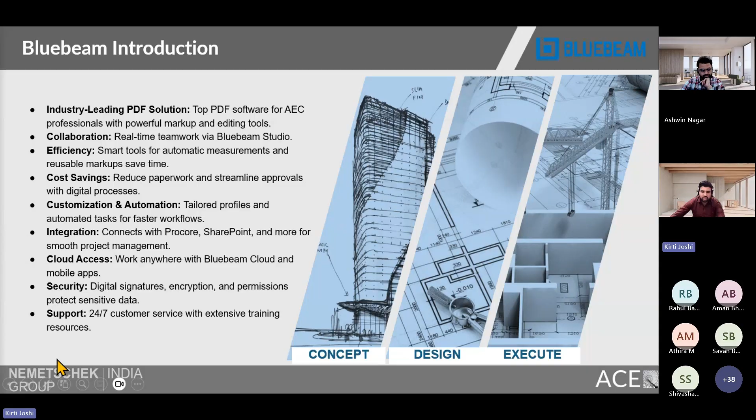Also, anyone can have access to various learning resources and free training courses by signing into Bluebeam University.

So moving to the next slide, now it comes to why Bluebeam? Why not continue with email-based review or basic PDF tools? Like I mentioned, first you can see it works completely on a PDF-based workflow, and we all are aware that PDF is universal.

For example, architects may be using Revit, structural engineers may be using another analysis tool, and even a contractor may be using different software, but everyone can open a PDF. So Bluebeam becomes that neutral coordination platform where no one needs specialized software just to participate in a review.

Second is the comprehensive tool set, all in one platform - you have markups, measurements, overlays, comparisons, or collaborative sessions, everything integrated within Bluebeam. This is extremely helpful for the outsourcing team because switching between multiple tools creates confusion and delay.

The third thing I'd like to highlight is cloud-connected collaboration. This is one of the biggest advantages for the global AEC outsourcing team. For example, your team in India finishes the markups for a drawing in the evening at 7 p.m. Indian Standard Time, and when the client in the US logs in the morning, they can immediately see those comments in the studio sessions. There's no waiting for long email threads and no more confusion about which file is latest. This obviously reduces the turnaround time significantly.

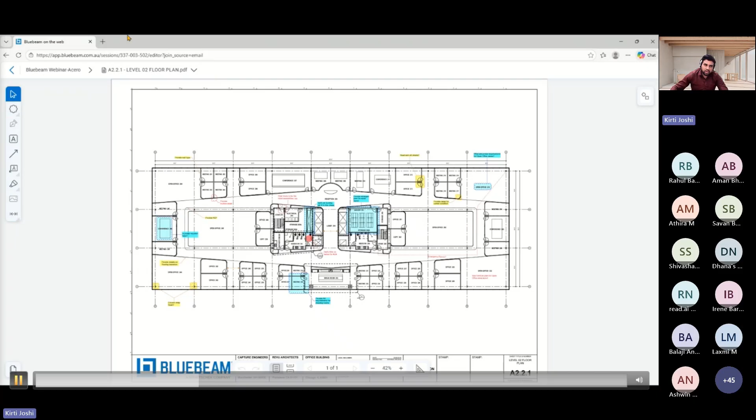Basically, in the web version, users can participate in providing markups and taking out measurements. There are a few features that are available, most of the features they can use, but there are other features limited to the web version. So I will split my screen to show the web version and the desktop version.

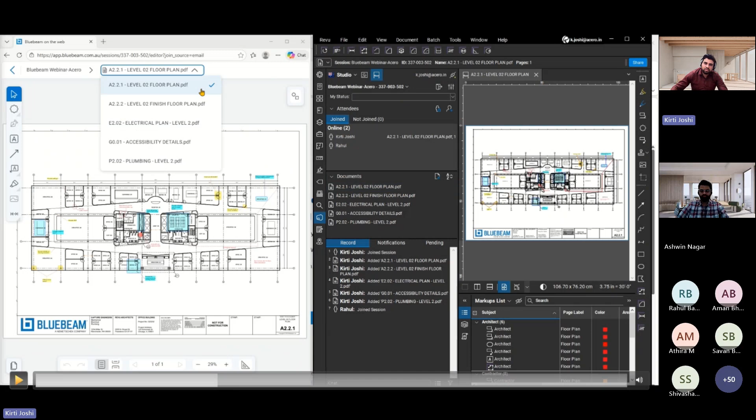So this is the web version, and now I will also open the desktop version. This is the kind of interface difference: in the web version, they get the commenting tools and measurement tools active, whereas in the desktop version they have all the features.

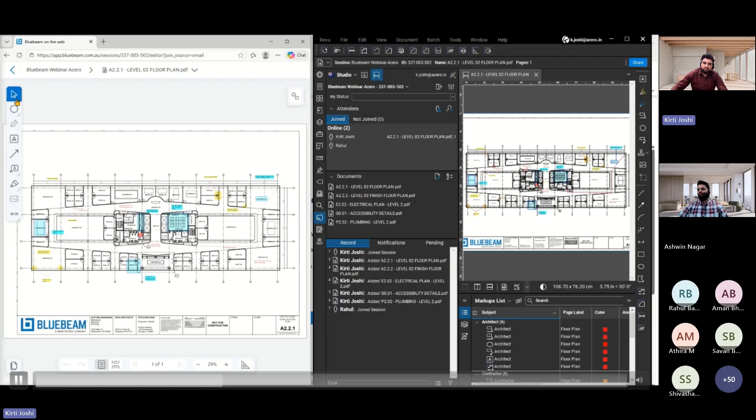For example, on the left-hand side there is no chat box, so this feature is limited in the web version. But on the right-hand side, you can see all the activities are being recorded. So this is the kind of difference between the web and desktop versions, but definitely they can participate in the review, adding markups, and taking out measurements.

So there are different sets of markups. I am creating one of the markups on the right-hand side, and we'll see if it uploads to Rahul's ID, which is through the web browser, or not.

So we are going to create one of the Cloud Plus markups, as you can see. On the right-hand side you can also see it getting updated automatically. So this is the real-time synchronization.

You can also change the text size and the font, depending on how much font size you want to add. So whatever activities you are doing in the PDF, it will automatically reflect onto the other person in real time.

So I'm trying to add a text box through Rahul's ID, and it has automatically been updated in my account through the desktop version.

So if I want to add measurements like annotations, it will automatically reflect in the web. I'm creating one in the web, and it is uploading directly into the desktop version. As you can see, the measurement of 30 feet, the annotation and dimensions applied through the web, is automatically updated in the desktop version.

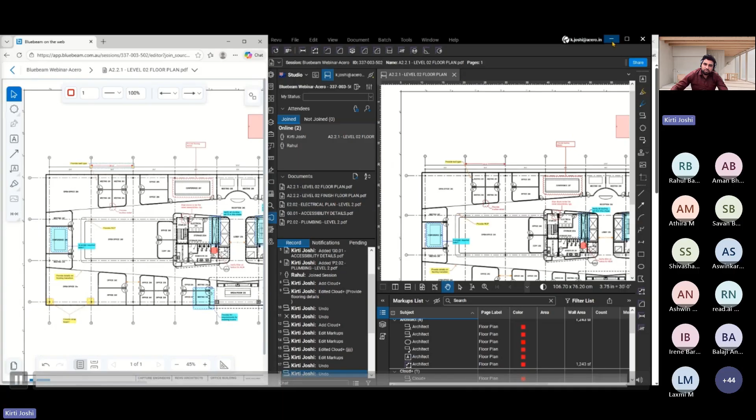So whatever your team members are doing in real time is automatically updated for all the team members.

You have the options on the left hand side of the screen. All of the things that I have done are recorded in the record options below. At the top, you have options to create markups and stamps. So all of these features are fully available through the desktop version.

But like I mentioned, participants can comment and provide dimensions in the web version. So I have created a stamp with our company logo, as you can see on the screen, and we'll see if this has been updated to the web version or not.

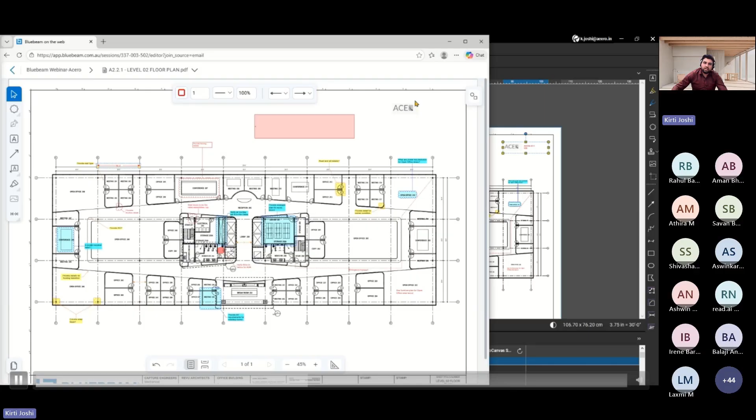Right now you can see it has been updated in the web version also, the stamp that I have created. So you can take out area measurements and it will automatically update in the PDF, and it will be visible in real time to all of the participants.

You can also allot your attendees by right clicking on the markup, so that attendees will be notified that a task has been provided to them, or that a comment is critical and they need to look into it. You can allot attendees from a participant and it will reflect in the record sessions. Right now you can see I've allotted Rahul from my email ID.

Also, whatever you are doing is updated in the record session as well. You have the options to filter out your chat box, filter out the attendees, and filter out your markups and drawings, so that only those particular things will be visible in the record sessions.

Right now I have allotted my other colleagues, so it has been recorded as well. You can filter out these options by simply clicking on the filter options at the chat box below.

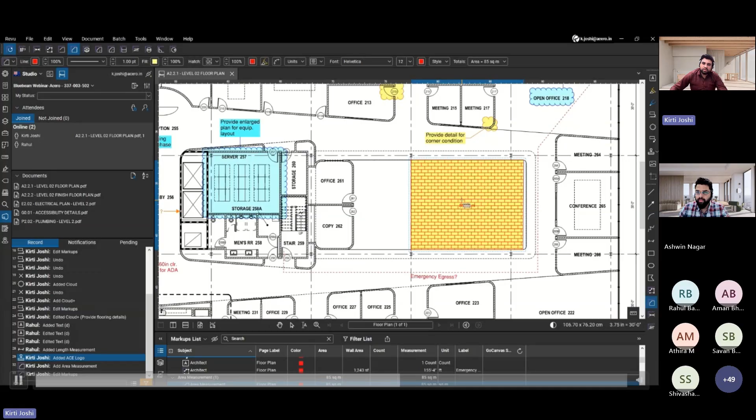So I have taken out the area measurements. We'll also provide some hatch, and we'll see if this has been updated in the web version through Rahul's ID or not. You can see this has automatically been updated in the other portions as well.

You can carry out different types of markups and measurements, and even compare your documents in real time by inviting all of your team members. I've just invited one team member for this demonstration, but you can invite up to 500 users in a single session.

You also have the options to control the settings of these studio sessions, like permissions. As the initiator, you can give out permissions to all of the attendees, such as whether they have the option to add markups or not. I have given all permissions as you can see on the screen. So you have the options to control and restrict, to allow or deny permissions to your attendees.

You can also assign permissions by groups. If there are multiple members from your organization, you can set up one permission by creating a group and assigning it to your team members accordingly.

Once you are done, you can generate the session report by simply clicking on the sessions report and save it. All the activities carried out in the studio sessions will be tracked, including the date, the time, which documents, which authors, and the messages they have provided. All of these things are recorded.

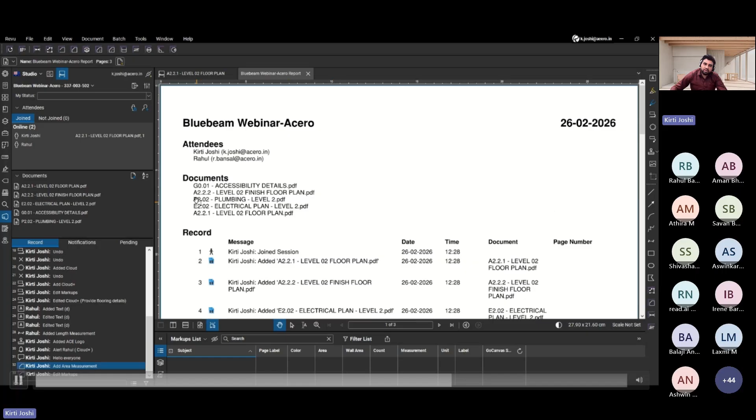You can just share the downloaded file with anyone, or share with all the team participants that this is the latest revision that has been done in the particular set of the drawing. Once you are done with this, you can finish the session. You can see the status has been finished, reviewing, or waiting. So you can set out your status.

If you have completed your part, you can set out the finished option. In the settings options, you have the option to leave the session, or to finish the session. The difference is when you leave the session, you will be able to join it again. But when you finish the session, you cannot.

You are finishing the session for good, and you will not be able to join it later again. Most of the time we simply click leave the session, and once you click on the drop down, there is the finish session option. If you want to finish the session permanently, you can use this option when your project has been completed, or if you don't want to review any of the files again.

Once you have all the things reviewed properly, you can click on finish the session, and you have the option to save all the things that has been done in that session or not. You can save that report, or if you don't want to generate the report, you have the option not to by simply unticking the generate report tab. So you can finish the session whichever way you would like, to generate the report or not for that particular session.

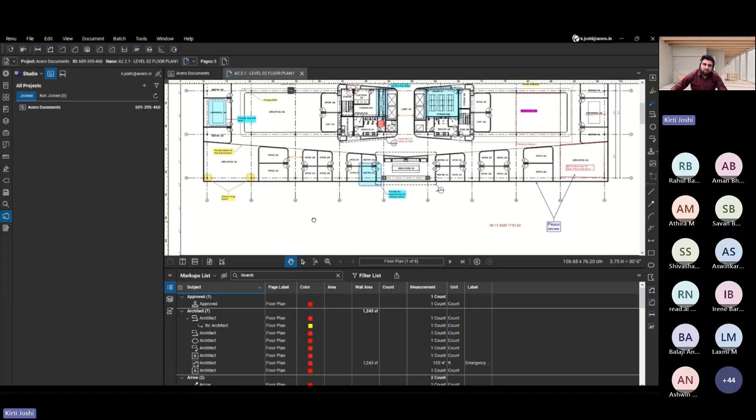So I will check out, then all the other tools will be active right now. On the left hand side, you will see all the tools are active once you have clicked on the checkout feature. If you are already using the studio session, you might be aware of these features as well.

So if I click, I have already checked out, so I can just put a comment. So I've already taken out one cloud and added a comment like provide the details. And what I will do is I will just check in, and it will update in the server. I also have the options to update server copy or check in, then it will update in the server. The latest file will be uploaded. I can also add whatever comments you want to add, so that it will display to the other participants.

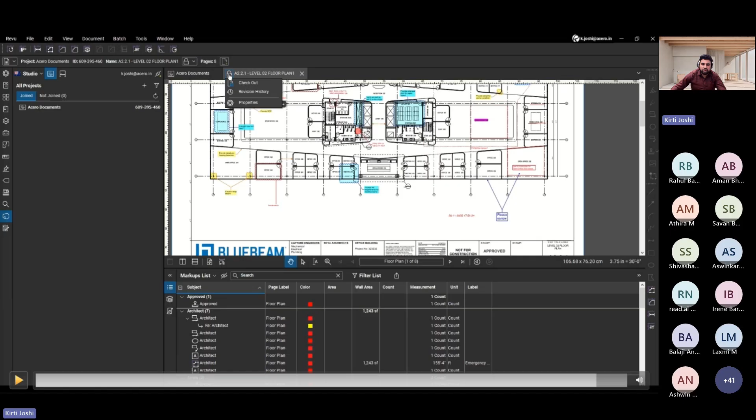Right now, once you do the check-in, in the left-hand side, again, you will be able to see that these markup features have been disabled. And once you click on the lock icon and check out these files again, you will be able to add other markup details as well. So at one time, only one person can work in this Studio Project.

And they can open the document and see whatever changes have been done. And by simply right-clicking, they can see whatever revision history has been made in that particular set of drawings by the date, the time, and the author. So you can track all these activities. And you can simply click and download it, or you can share the link with your team members as well.

You can also set a password so that other people have to use the password link to open that file. So you can set the permission levels, so you will have all those options. So this is basically about the Studio Sessions and the Studio Projects that will help you in real-time collaboration and for storing your documents in the cloud.

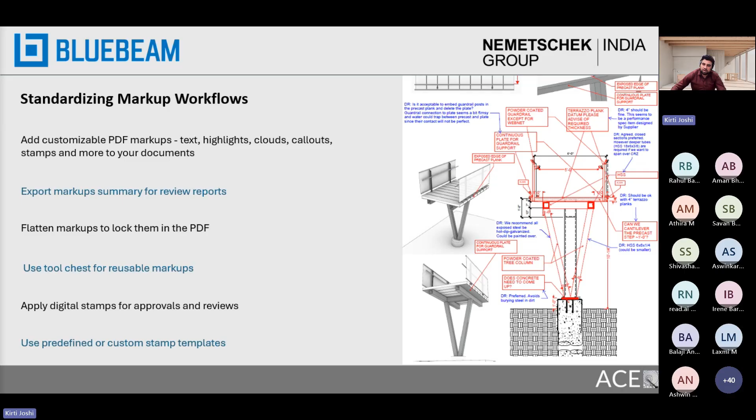So moving forward, Bluebeam also allows you to create markups. It may be the cloud, callouts, the highlight, the text box, the stamp, or the measurement. Again, with the Tool Chest features, you can save your frequently used markups, and you can create a predefined comments library for your organization. And you can also export the markup summaries into a structured report for submission. And once approvals are finalized, you can flatten the markups into the drawing. So all right, let's see how this actually works. I have created a short video to show you in the next slide.

So this is again the interface. If you click on Revu, you will be able to see which version you are using. Right now, the latest version is 21.8. In the top bar, you will have the options of viewing your documents. The batch will work when you are working on multiple PDFs at once. And on the right-hand side, you will have your email.

And by simply clicking on that, you will have the information on which region you are using, because it is server based. Bluebeam creates the account based on the server. So like I mentioned, India comes in the Asia Pacific region. So we have to select the server region Australia, like you see on my screen, and the plan of Bluebeam which you are using will be displayed.

And again, once you click on the Help bar, you will have the options to check for the latest updates. And if you are new to Revu, you will have the tutorials through the help file. So simply by clicking on the tutorials, if you are a beginner, you will have short videos and all the information about how you can use Bluebeam. So you can just use this help feature to learn about the software.

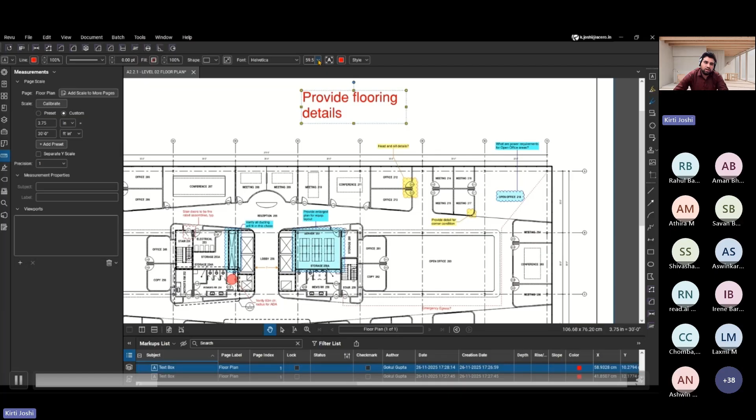Right now you can see the text is a bit small, but we can auto adjust it by simply clicking on this A box at the top. You can see this will adjust my text box according to the size of the font. So you don't need to manually worry about the text size. Once you click on that box, it will automatically update the text font according to the box. Also, you have the option to drag and drop to change the text box size.

There are highlighters available if you want to highlight any parts of your drawings or the text. You can simply click on the highlighter and start pressing it, and you will be able to highlight it. There is also the callout feature available. You can simply put an arrow, as a callout is nothing but a combination of text and an arrow. You can point it at any part of your drawing and add text in it.

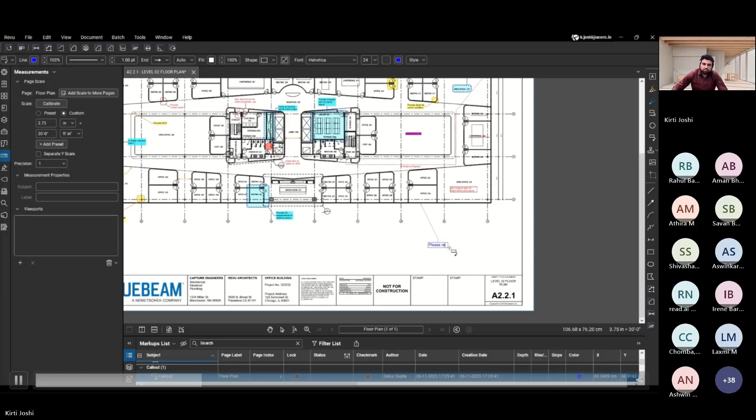Also, once you right click it, you will have the option to add more arrows to it. You can definitely add multiple arrows within your callout, just to point out multiple points on a drawing. You also have the snapshot feature available. It works as a copy. Once you click that feature, select a rectangle and then Ctrl V, it will snapshot it like a copy feature.

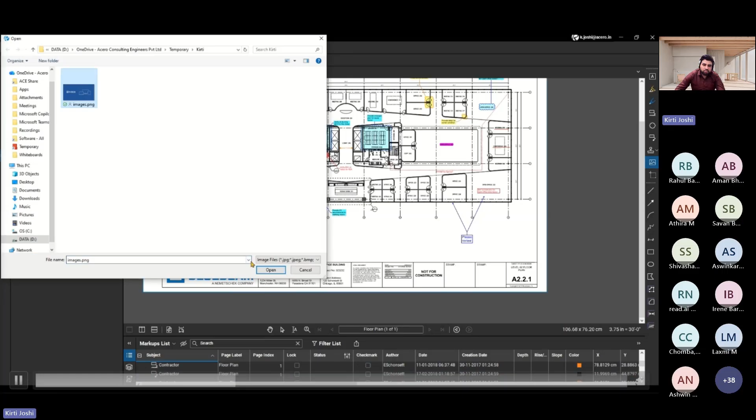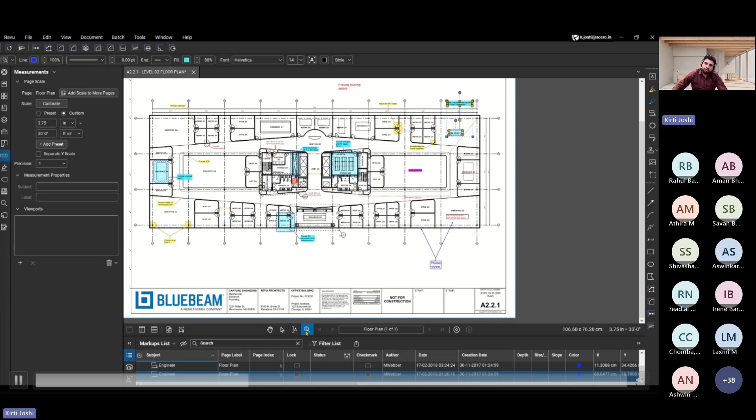You will also have the option to insert an image by simply clicking on the image box. You can increase and decrease the size of the image. Another important feature is that you can insert the image within your markup so that it reduces the space. For example, if I want to add an image within this markup, I can simply click on it, right click, and you can see Capture and From File. I will add this image, and you can see you will have the camera icon here.

The camera icon means that the image has been added to that particular markup, and once you click on that icon, it will open the image. So you have the option to add the image in a different way as well: one way is to add it directly and the other is within the markup itself.

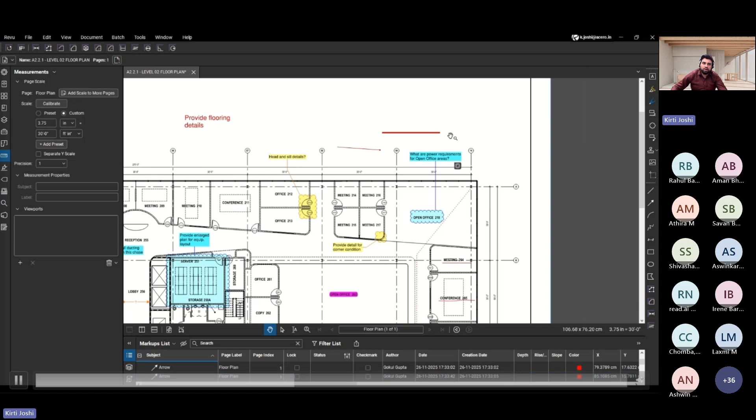You can draw lines, you can put different kinds of arrows, and if you press Shift with this arrow, it will make a straight arrow. So you can add different types of arrows. Once you click on a particular markup, the property toolbar will open at the top, and here you can assign the properties for those lines or any other markups you are working on.

In the tools feature, there are other types of markup available. There is the cloud and the cloud plus. The cloud plus is just like a cloud with an additional text box. So you can use different types of markups and keep things organized while working on a PDF drawing. Also, if you are adding a markup in real time, it will be displayed to all of the participants in the session if you're using markups in a Studio Session.

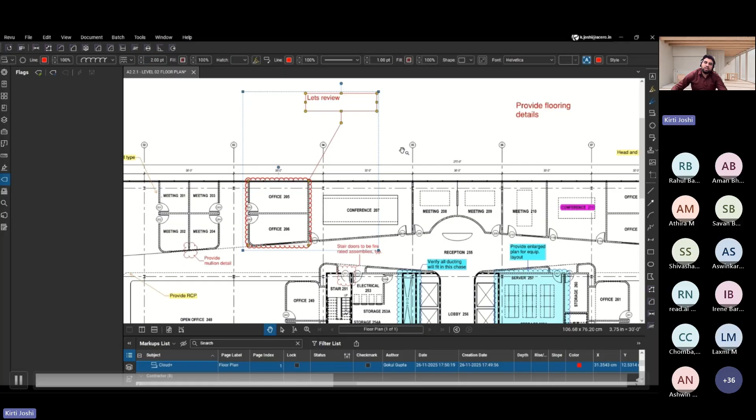So again, the stamps. After the markup, you can add the stamps. There are lots of predefined stamps available. Also, you can create your own custom stamps, for example, a company logo or anything. You can also add that stamp as well.

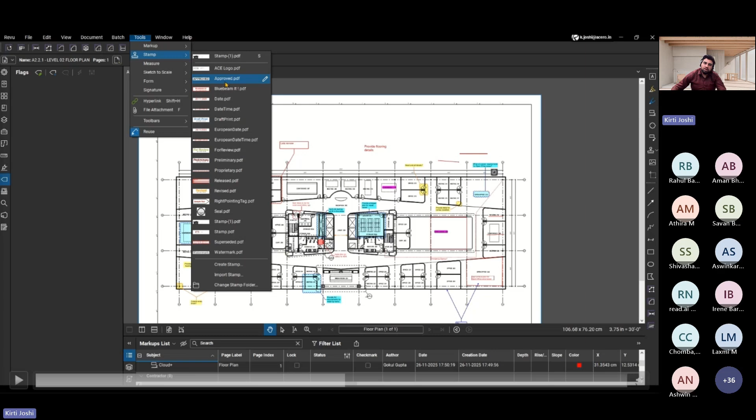For example, I am taking the predefined stamp from Revu, and I'm just clicking it. Also you can increase or decrease its size, the font. So this is one of the ways you can use the stamps feature. Lots of predefined stamps are available.

And also I can use the other stamps as well. For example, if you want to create a new stamp, you can definitely create it. There are lots of stamps like date and time, for example, then it will display the date accordingly.

And the next is the tool chest feature. If you do not have the tool chest feature on the left hand side, you can just simply right click and click on the toolbar option, tool chest option, then it will be displayed. The tool chest is basically the sets.

What it does is it puts your tools, like the markup tools. You can predefine your markup tools and save them for the designation. For example, there are tool chests for the architect, for the contractor, for your mechanical system, the plumbing system, the electrical, firefighting, landscape.

So you can create different icons or symbols and save them into the tool chest, and you can simply click on any one of the tools and put it into the drawings. That is how you can use the tool chest. In the settings option, you will have the options to see the tool chest in detail as well as the symbol options. So it basically saves a lot of time.

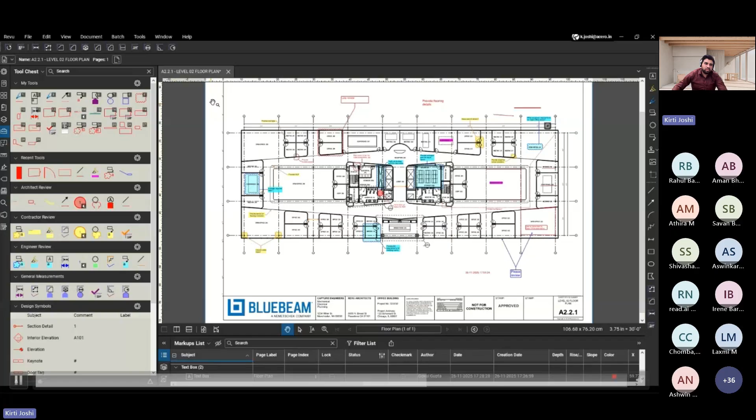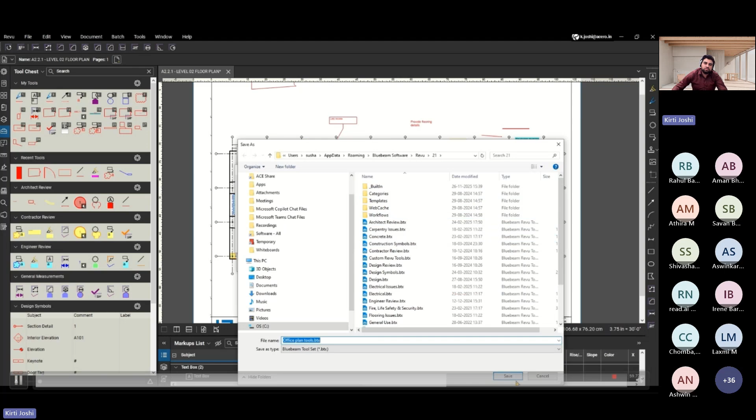Right now you can see the recently used tools are displayed, and you have the options to import and export your tools as well. We'll see how you can import. We'll also see how you can create your custom tool chest, and how you can import the tool chest that can be frequently used for your drawings and your projects.

So I created the custom tool chest, office plan tool chest, so in that one tool chest you can place a lot of other tools. You can simply click and drag from the other tools, for example, the architect review or the contractor review, and place it within that tool chest. The next time you open a project, you can simply use that office plan tool chest which you recently created.

Also, you have the options to delete the tools from any of the components. You can just simply click and drag it. For example, you can differentiate by the colors, and it will all be tracked in the markup list shown below. Whatever activities, whatever markups you are adding, are all tracked in the markup list.

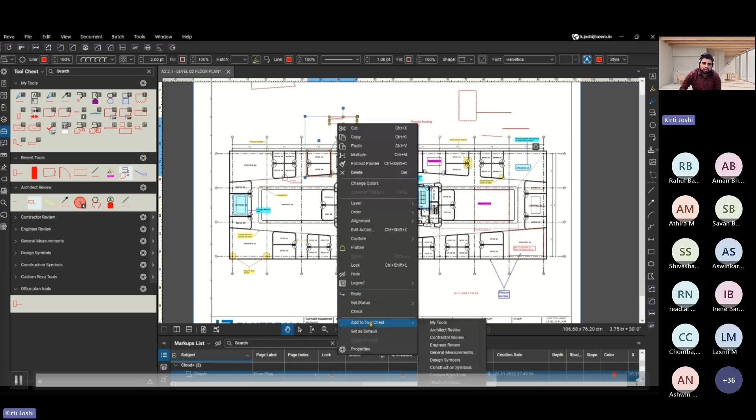And if you want to add the markup to your tool chest, you can do it by simply right clicking it. Right now you can see there are some design symbols and some general measurement symbols already available that you can just drag and put into your drawing.

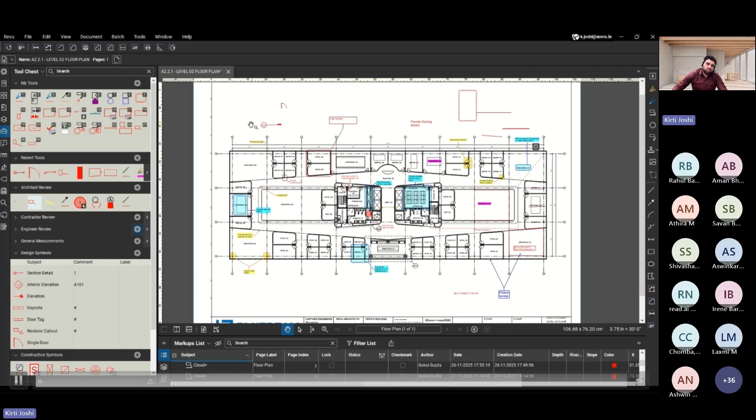There are door symbols, so architectural symbols are there, but a few components like the electrical or the mechanical systems are missing right now. We'll also see how you can import them. Revu has a custom library for the tool chest, which you can directly import into the tool chest panel. They have the measurements, they have the count.

So most of the features are already available, but you can definitely create your own custom tool chest and import it. So I've opened a different plan, the electrical plan, and I will also open more files like the mechanical layout and the accessibility details.

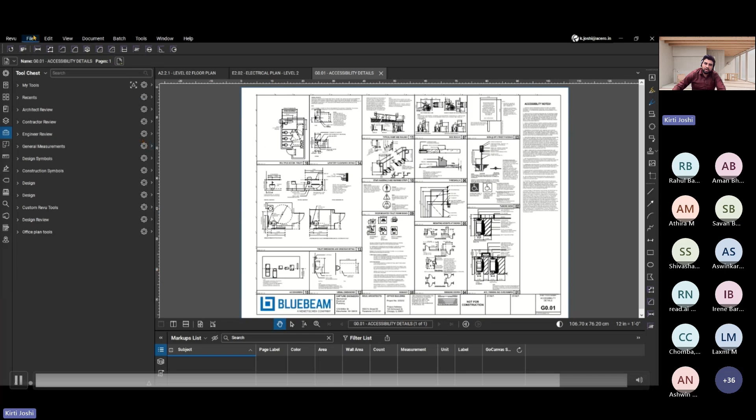So I will add multiple files and will try to add the tool chest that you may need to apply in that particular set of the drawings. So I have multiple files open. For example, if I want to add a custom tool chest for my electrical plan, then Bluebeam Revu has a definite custom library for that. And we can just download and import that within the tool chest and it can be used in your drawings.

So once you click on this tool chest option and click on manage tool set, you will have the options to add and import. So I've already downloaded two, for the electrical and the window, but I will also show where you can download your custom library and import it into the tool chest. Sorry.

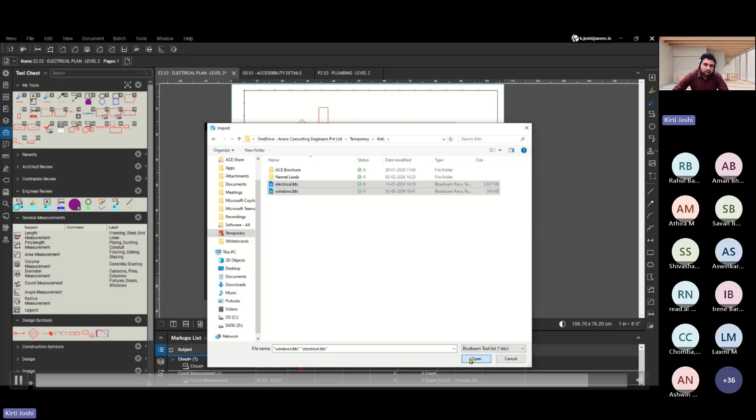So the electrical tool chest, a lot of the symbols I have already added by importing. So that I have already downloaded and I've just imported. So this is the custom library, from the Bluebeam website, you will get a Revu custom library. So lots of the libraries are already available for the tool chest and the stamps as well. So it's for the mechanical, plumbing, electrical.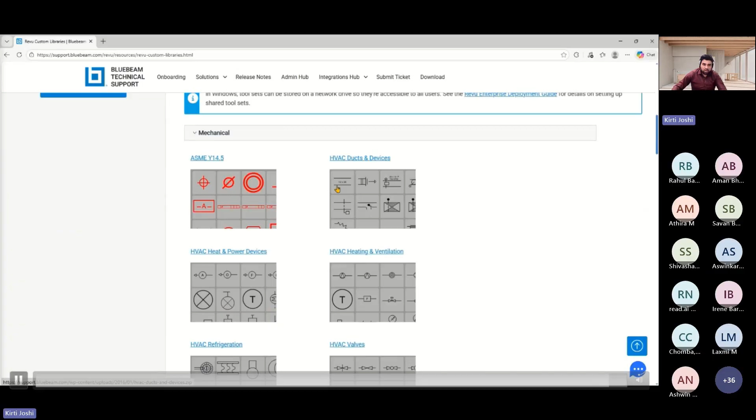You can simply click on any of these options and download it. And the way I have imported, you can just import it using the tool chest feature, and you can just apply it within your drawings. So this is regarding the markup and the tool chest features.

So moving forward, the document comparison is one of the most time-saving features. In the traditional workflows, when a revised drawing is issued, the engineers manually scan for these changes, which is extremely time-consuming when dealing with 100 plus sheet packages. So Bluebeam's compare documents tool automatically highlights the additions, the deletions, and whatever modification has been done between the two PDF versions. And within seconds, you know exactly what has been changed.

Also, the overlay pages is an equally powerful tool. It is also for comparison. You can superimpose your structural or architectural layout and check out the alignment issues, for example, the column shift or the wall adjustment. So this will definitely help in coordination for the clashes before they reach the site. So I will also try to show how this works in real time.

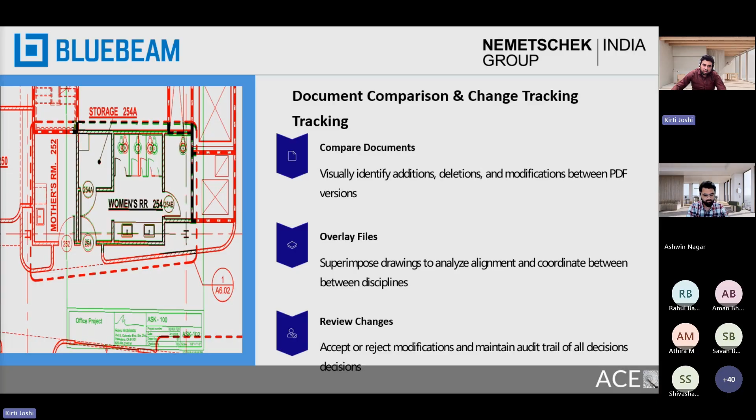So the overlay pages, for example, I have already opened two files. You can see the floor plan and the floor plan with revision one, and we'll try to see what is the difference between these two documents and how we can compare the difference by using Revu's powerful compare and overlay pages tools.

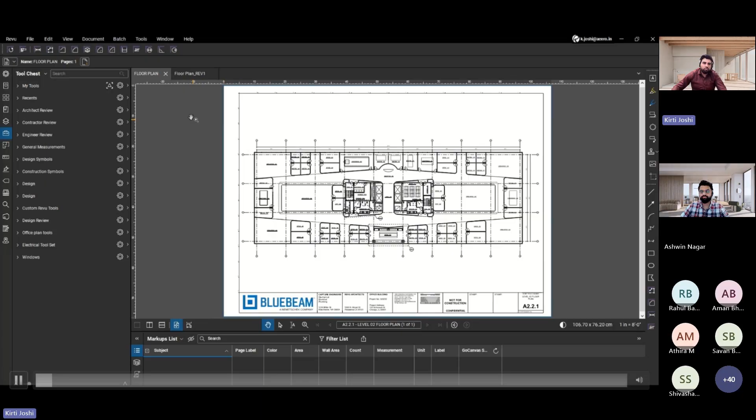You can split your documents as well. One way is you can split your document and compare, but it will take a lot of manual time because the two drawings almost look similar. So it will be difficult and time consuming to find what the changes are in the two drawings.

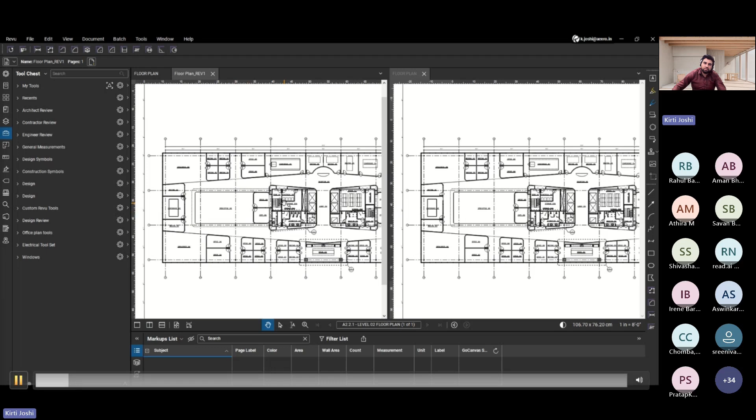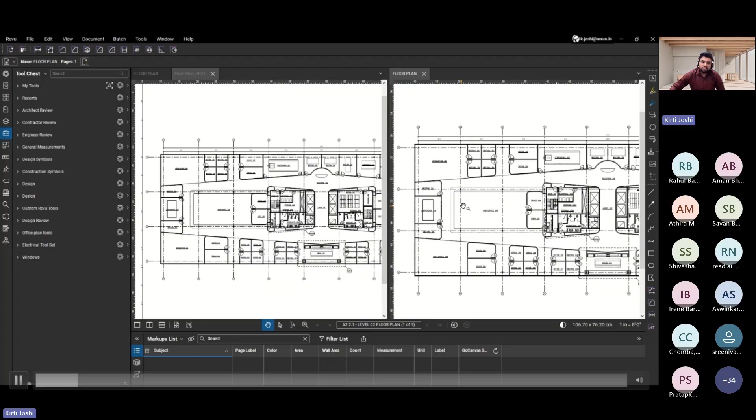But as I know already, I will quickly show, you can see there have been two doors here in the left hand side drawing, and in the revised drawing, there is only one set of the door. I know this already, but if you are new to the drawing, it will take a lot of manual time just to check out the revisions.

So we'll use the overlay and the compare documents features to easily identify whatever changes have been done in the drawings. So in the documents tab, you will see the option of overlay pages. First, we'll go with the overlay pages, and you will see your floor plan. The first document is the floor plan that has automatically been opened.

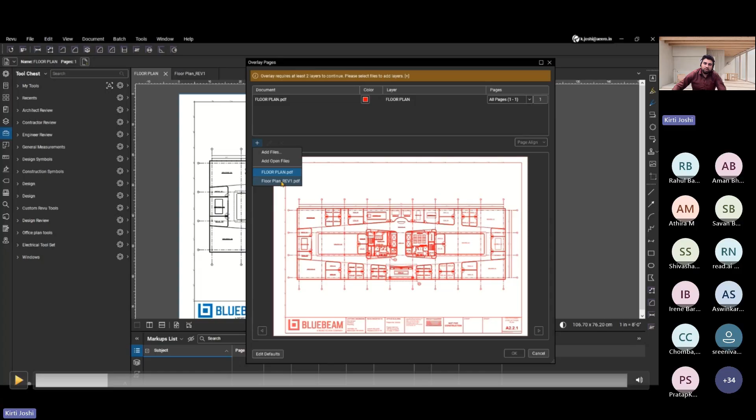And if you want to add more documents, by default, it will take the first plan. So the floor plan has been taken, and you have the option to click the plus icon, and you can just add another file. For example, the revision one I will add. So right now you can see they have been separated by color at the top.

The floor plan is set by the red color, and the other revision is set by the green color. Right now you can see it has been shifted. The two plans have been shifted, that's why you are seeing different colors.

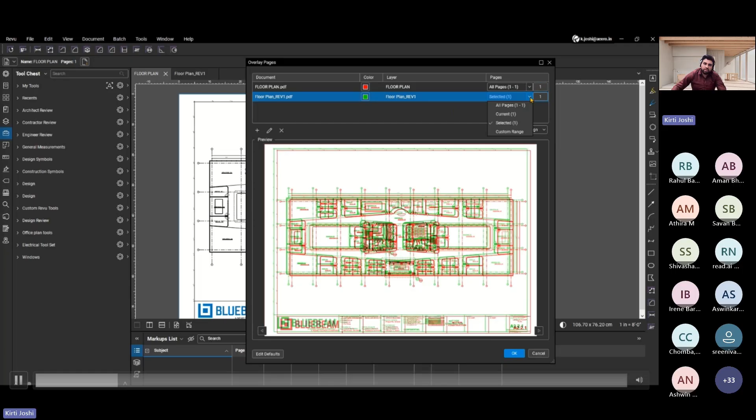But you can set up a manual align, or set the auto align feature, just to superimpose one drawing over the another and see the differences. In the drop down, if there are multiple pages, you can set out the pages if you want to overlay. So there's the option of the auto align feature that I'll use, which will automatically align my pages instead of manual align.

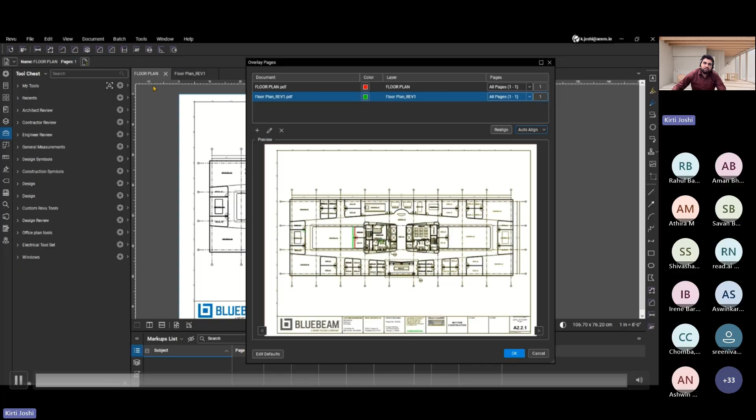You can see the difference that has occurred. If there is no difference between the two drawings, it will show in black color, and the difference has been identified by the green and the red, as we set up our color. Once you click on OK, you'll get another file of overlay pages where you'll see that difference. So I click on OK.

You can see right now there has been the green and the red as well, in which the drawings have changed, meaning that particular page, that particular section, has some changes. For example, as shown earlier, there is only one door in the revision, two doors in revision one, and one in the revised drawing. So it has added the markups, like it has added a green symbol here - this part of the drawing has some changes.

Again, you can see some of the difference here, because this might be due to some issue of space - a revision has some spacing lesser than that of the actual revised drawing. We'll definitely check this by comparing the dimensions and taking out the length measurements in the compared drawings. So this is the next feature, the compare drawing and the overlay.

The basic difference between compare and overlay is: in overlay pages, it will superimpose one drawing over the another and show the difference by color. But in the compare drawing feature, it will not superimpose - it will just highlight the difference by the markup that we're going to see now.

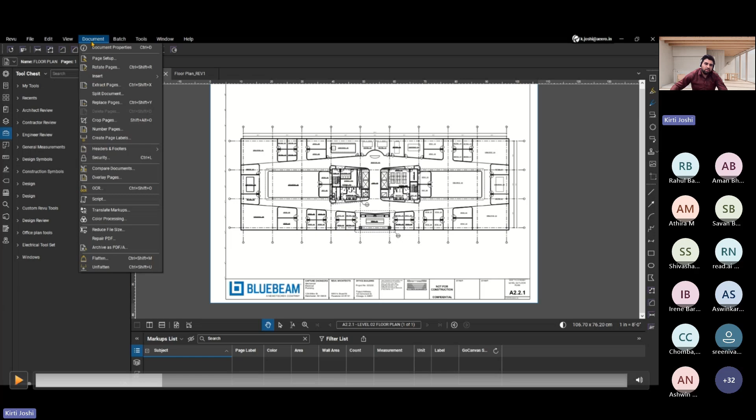We'll just click on compare documents, and you have the options to add two different sets of drawings. So I'm again putting the same drawings and using the compare document feature. Right now I'm using again the auto align feature - this is the AI tool that Revu uses to auto align the pages.

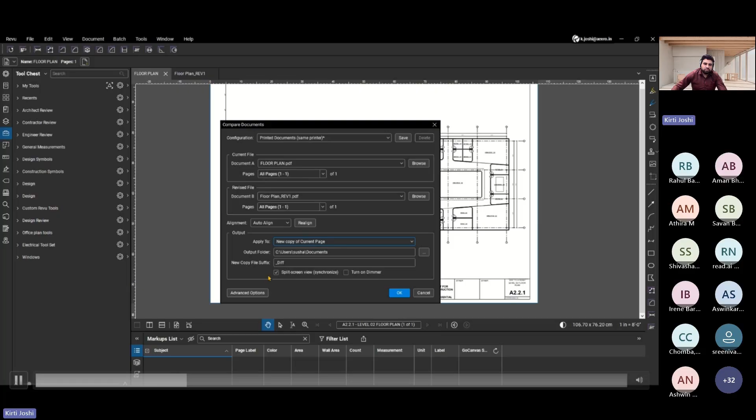So if you click on the split screen view and synchronize, I'll also show how this feature works. Once you zoom in, the other revised drawing will also synchronize, meaning the two drawings will be synchronized at the same time. Right now you can see in the compared drawings, the revisions or documents have been updated with markup instead of the different colors we showed in the overlay pages.

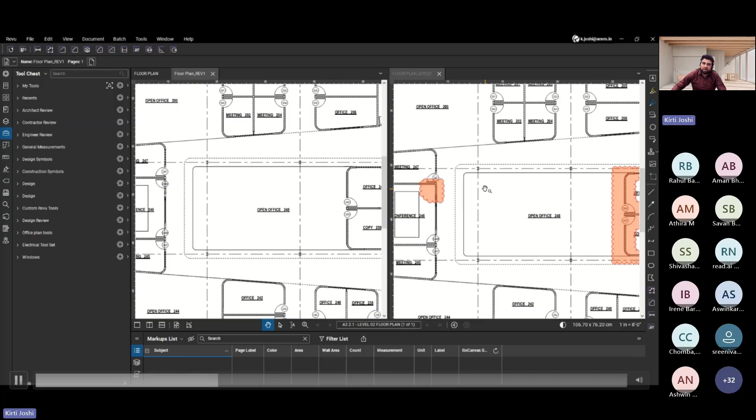There is one door and two doors difference in the revised drawings, so it has highlighted it with different markups. It will quickly highlight whatever the difference is, whatever the addition is in your previous set of drawing, or whatever modification you have done in your drawings.

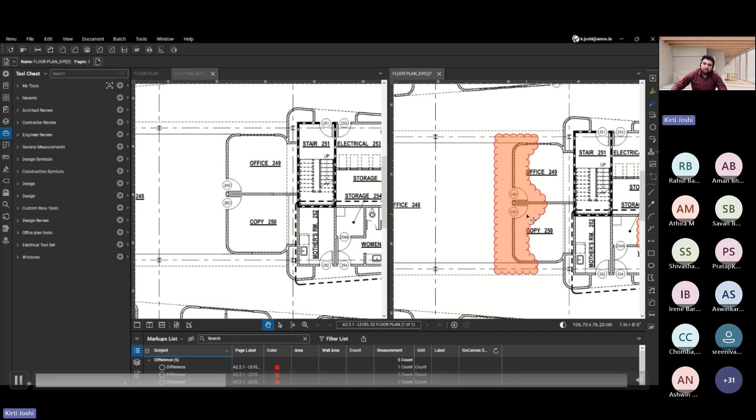Right now you can see on the left hand side, the office area is slightly bigger, and on the other side the office area is slightly smaller. That's why it is showing some modifications in the area, and it has captured it with a markup symbol. We'll verify this by measuring, taking out the length measurements, and we'll see if this area is obviously small, the same, or different.

So we can use the measure and length features, and simply click between the two points and check out. Once I click between the two points, you can simply zoom in to click that point more accurately, then zoom out, and it has given me the length of 4170 mm. We'll quickly see what is the length in the first PDF.

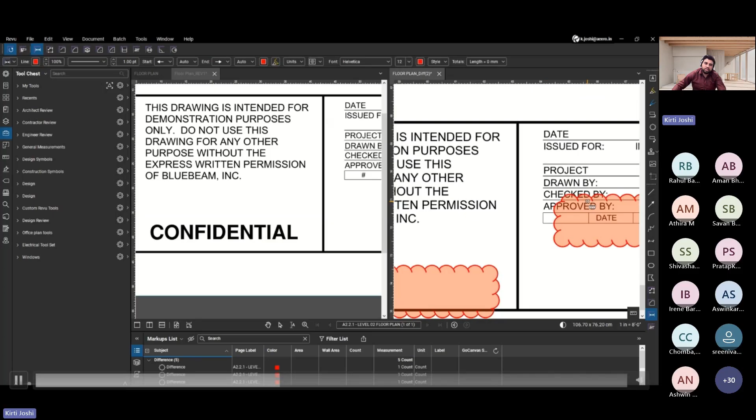Right now you can see there is one difference in the length, that's why it has highlighted it with different markups. It automatically captures whatever text content is there in the revised or the older drawing, it will also capture that as well.

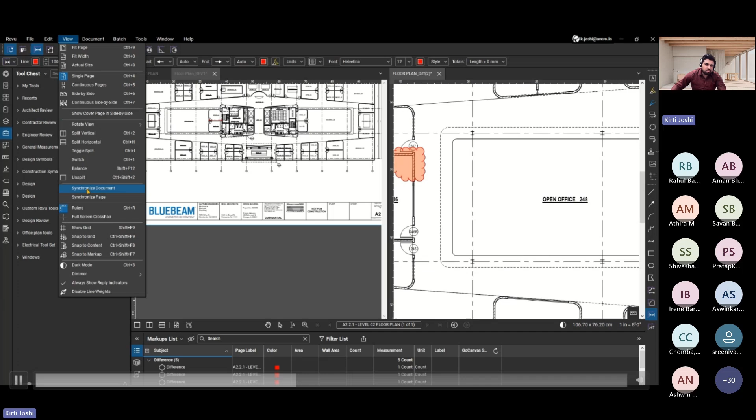So it's a good tool to compare the drawings between the revisions and the older set of the drawing. If you untick the synchronization page option and zoom out the overlay or compare pages, the other documents will not synchronize at the same time. So it's better to keep the synchronization option active.

So this is the best way to compare and review your drawings, whatever changes or modifications have been done. In the view option, you have control over how to see your page, like actual size, single page, or continuous page. For example, if you have multiple PDFs, you can use different types of page setup just to view your documents.

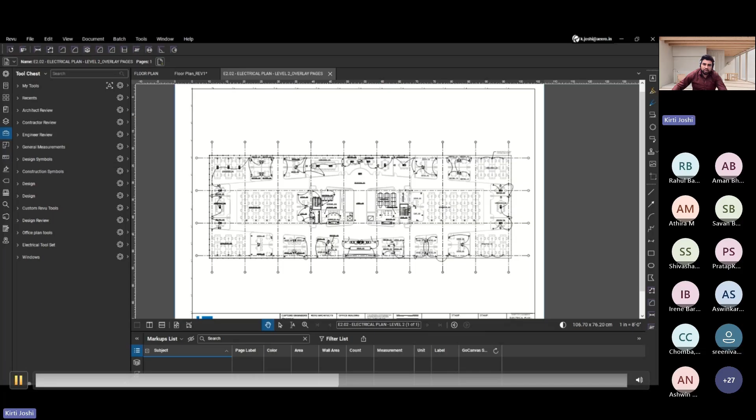And if you have multiple sets of drawings, you can combine them into one PDF. For example, I have these three drawings here as single pages, and if I want to merge them into a single PDF, I can do that using the file option at the top, with the combine feature, as you can see.

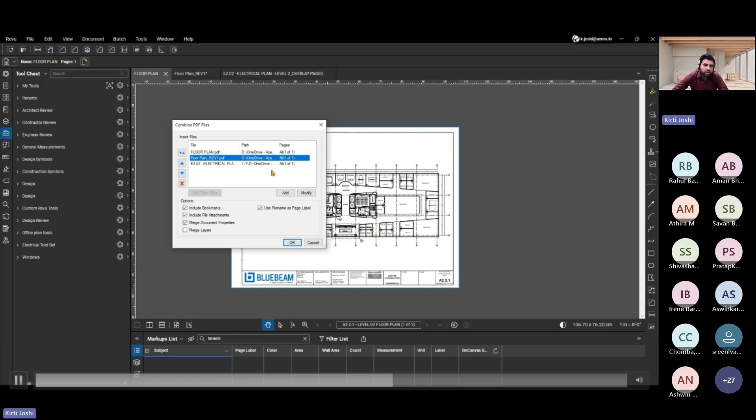Once you click on the combine feature, you can add the open files, and it will automatically open the active files so you can select whichever files you want to merge. You can simply use the drop down to place the files' order, like if you want to add them in a certain sequence. Once you click OK, it will combine all the PDFs into a single PDF.

So here you can see the 3 pages below—it's a PDF with 3 pages. If you go to the view options and use the continuous page option, you will be able to scroll down. So once you go to document view and use the continuous page option, you'll be able to scroll down, like I mentioned.

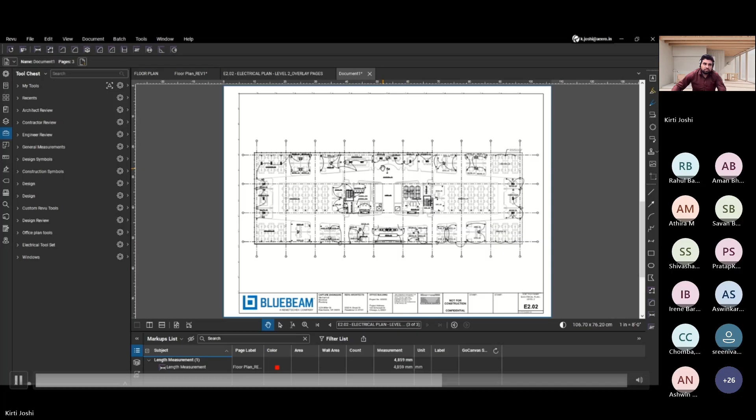So you can work on drawing comparison by overlay, or you can combine a PDF by using Bluebeam.

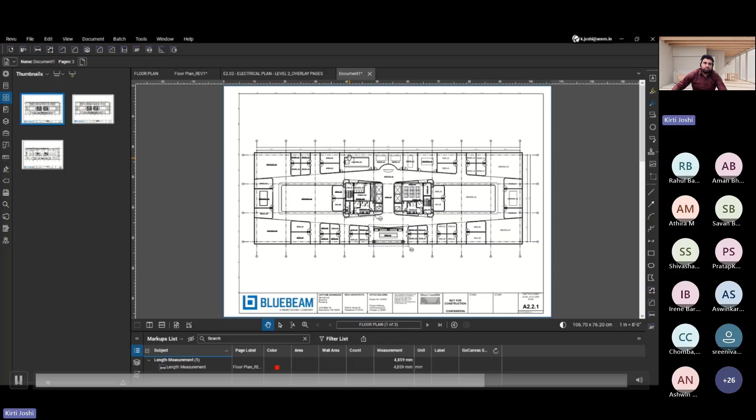On the left hand side, you can also see the thumbnails, so this PDF has 3 pages and you can see the preview as well. This one has only 1 page, so it shows me only 1 page in the thumbnail options.

Another feature is inserting new revision pages. Say revision 1 has, for example, 20 sheets, and revision 2 includes 10 updated sheets. Instead of manually replacing your pages, Bluebeam can automatically detect and insert the new page revisions into your drawing set.

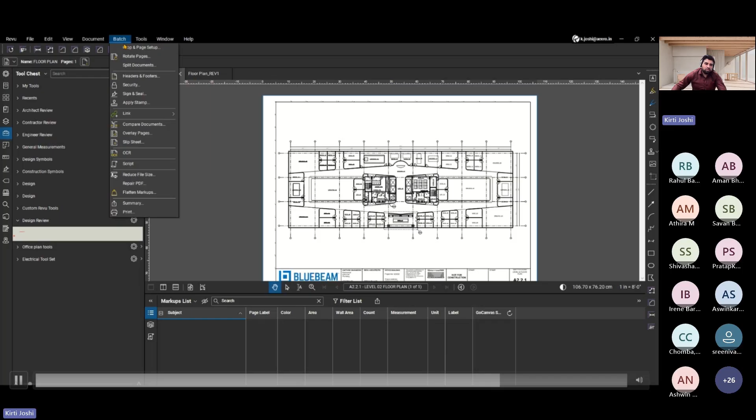That can be done through the batch option, which has a slip sheet feature. You can use this to automatically insert new page revisions. You can select and add different files—I have 2 files active right now. The current file is the floor plan, and the revised file is named revision 1, and I can match them by the different file names.

Once I click match the pages, it will automatically match the active pages for my drawings. Now you can see the match pages have been matched. Below, you can see the option to insert the revised page before the current page—you have 2 options. If you use this option, you'll have the option to stamp the current page as superseded. It will highlight the current page with the superseded stamp, which we'll see now. So we'll simply click OK. Everything looks fine to me now.

You can just replace the current page with the revised page. By clicking on that, you will not be able to see the superseded page because it will replace that page.

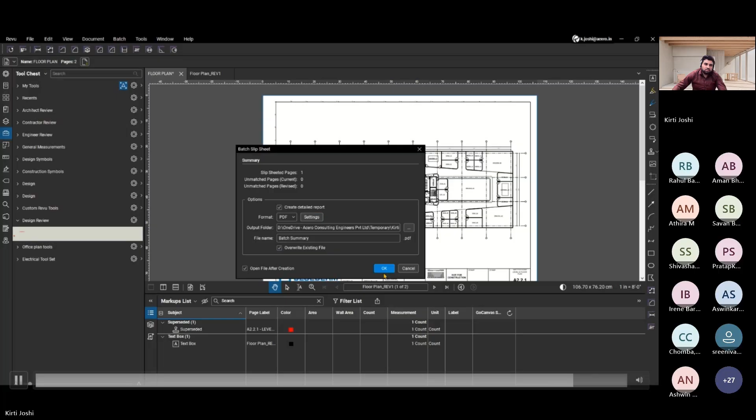Once you click on OK, you will have the batch summary. And in the floor plan, it has automatically been updated with the superseded page, because we have used these options to insert the current page with the revised page.

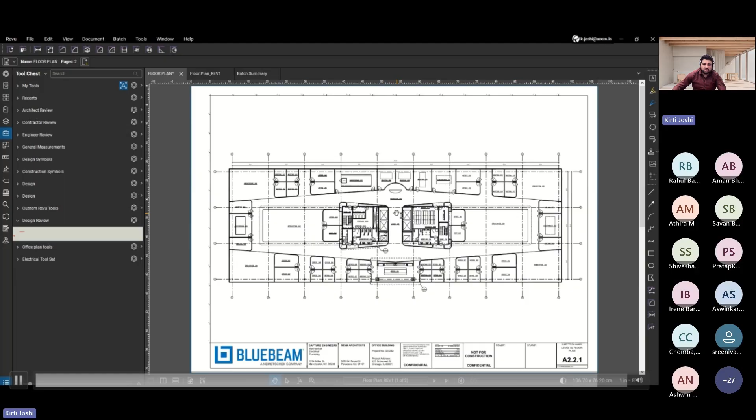If you have multiple sets of drawings, like I have only one page here right now, you can just use this batch feature. You can use the slip sheet feature available under the batch, just to insert the revisions to the new pages. So you will have a summary report as well.

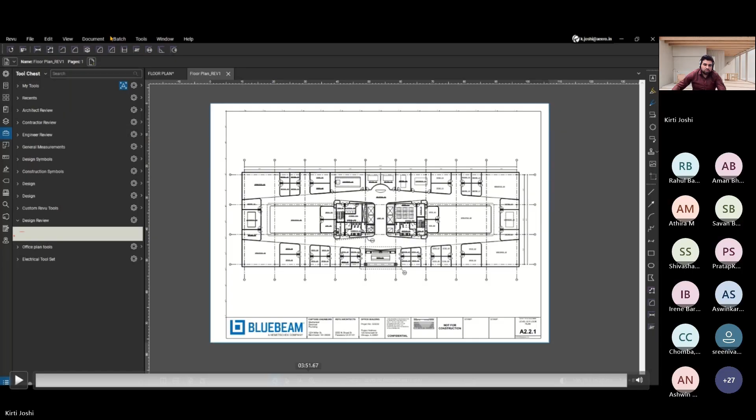So you can just simply click on any of the options just to view. We are already at the last one. I have only one more thing to show right now, the batch process. So I will quickly show how to translate the markup, because when you are working with multiple clients, language can be a barrier, so you can translate your markups in Bluebeam.

For example, right now you can see the markups have been added and highlighted in different colors. We'll try to see how to change these markups from English to a different language. You can simply click on the markup list and it will direct you to the markups from the PDF. You can click on the plus icon, zoom icon, just to make it a bigger size.

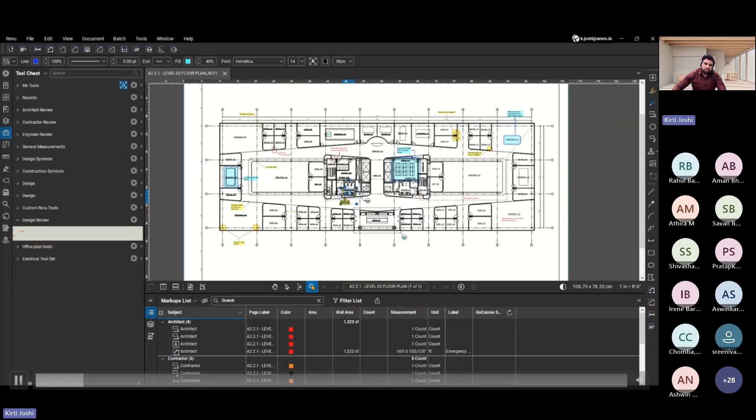Right now all the markups are in English, and if you want to translate it to another language, for example if you are working with a German client and they have put the markups in Bluebeam in German, you can simply translate the markups from German to English. Bluebeam has the feature to translate into 60 different languages. Once you click on the translate markup feature...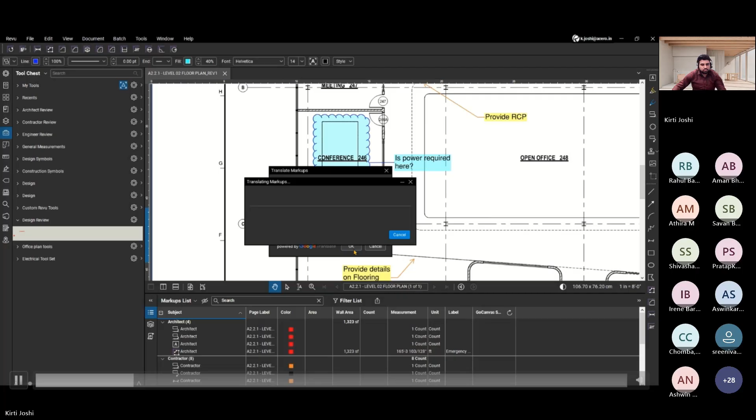The next one is the OCR, this is the optical character recognition. For example, if I have a PDF, I can select the text from the PDF. But if you have a scanned image, like scanned drawings from an old project that is completely non-searchable, then with the OCR feature, Bluebeam converts them into a searchable PDF. So you can search for any keyword instantly.

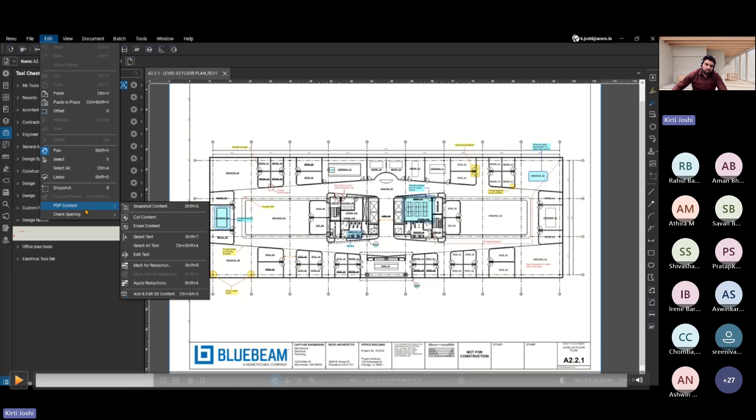For example, this is not an image, so I can simply click on the edit option and select all the text, like I show here. So all the text has been highlighted in blue, but I will just try to extract this PDF as an image and see how this OCR works. So I can simply click, if I have the option to select the text, then I can easily edit all the text in my drawings, as you can see.

But it's very difficult to work with a scanned PDF. Revu can automatically convert the scanned PDF into searchable text. So what I will do is extract it as an image, save that, and in the next tab I will just open that image.

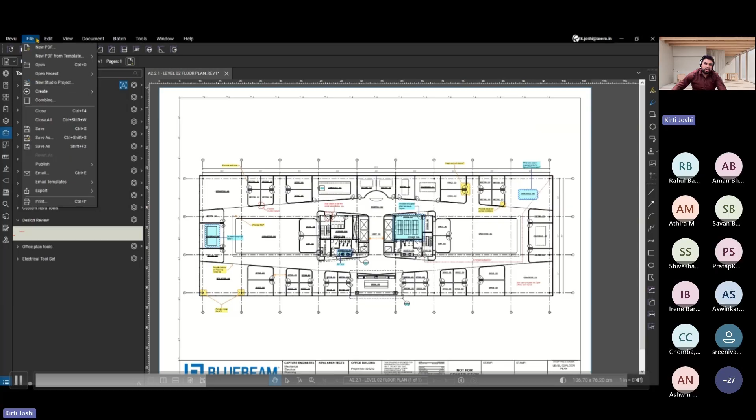As you can see in the options below, right now it is PDF, I will just change this to image. I've already saved that image. In the next tab, the image has been opened from that same PDF. If I click on select the text, right now you can see no text has been selected because it is an image, that's why it is displayed in gray color.

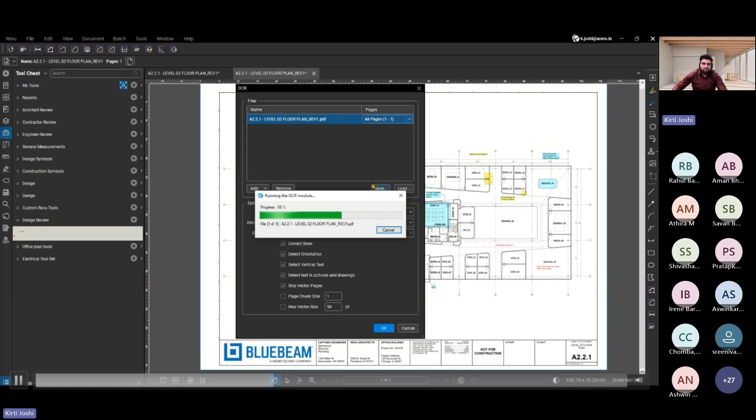So what I will do is, under the document option, there is the option of OCR. I will use the OCR feature to convert it into searchable keywords. So I can select the PDF and set up the settings, for now I'm using the default. I can simply click on OK, and it will take some time to convert that drawing.

Right now, if I want to check if my image has been converted, I can simply click on PDF content and select it. Right now, you can see all the text has been converted, all the image has been converted into searchable text. So I can use this feature.

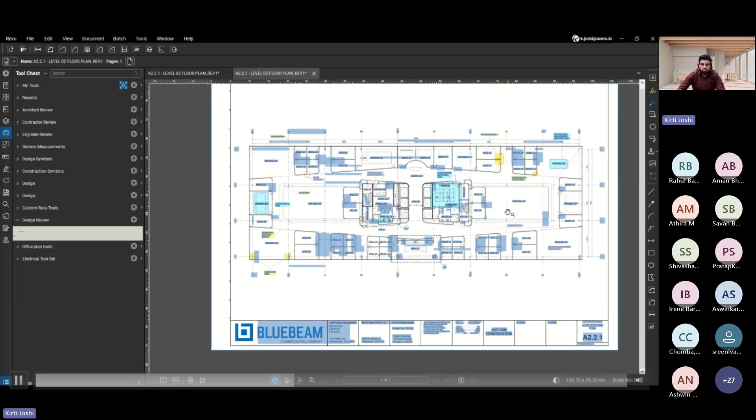If you have the scanned drawings from an old project, you can definitely use this feature to translate it into a searchable one.

Batch is another feature if you want to work with multiple PDF files at once. For example, if you have a large set of drawings and want to apply a stamp or signature to different PDFs at once, you can use this batch feature. With batch features, you have options like compare documents, sign, stamp, combine, and overlay. All of these features are available, but we'll quickly look at one of them.

What I will do, since there is a single PDF, is combine these two PDFs and try to use batch to apply the logo in both PDFs, both pages, at once. I combine this PDF using the combine feature, and now there are two pages. I will use the batch feature to apply the stamp.

If you click on any of the stamps, you can adjust its size to whatever you want. But if you want to put a custom stamp you have created, you can use that as well. By simply clicking on the dropdown, you will see a lot of stamps available. I will click our ACE logo, and you can see the logo with today's date.

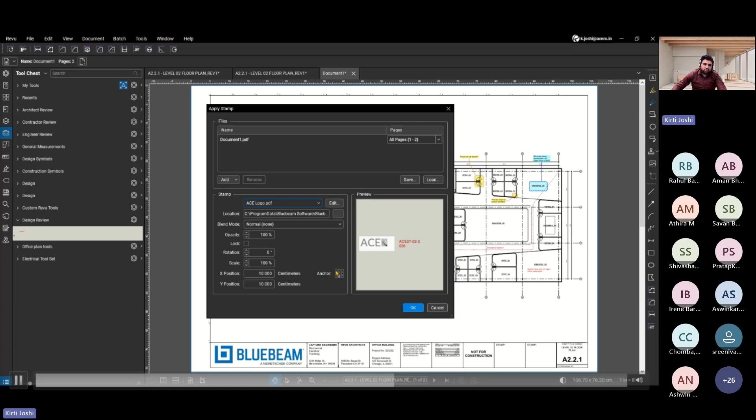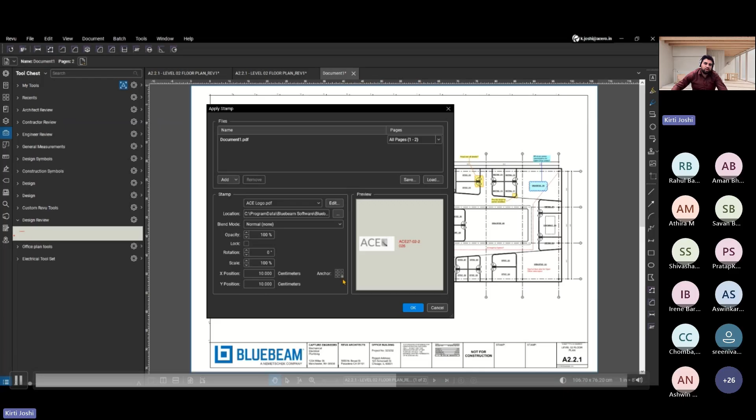You can simply place the stamp wherever you want. For example, there are 9 positions available - top, bottom, left, middle, and so on - so you can decide where to put the stamp. You can also set the X and Y position. For example, by default, I want to set it at the bottom of the page on the right hand side.

You can see that using batch, it has already been applied to both pages - the logo has been updated in both pages. For example, if you have a 100-page PDF, you can definitely use this feature to apply stamps across all 100 pages at once.

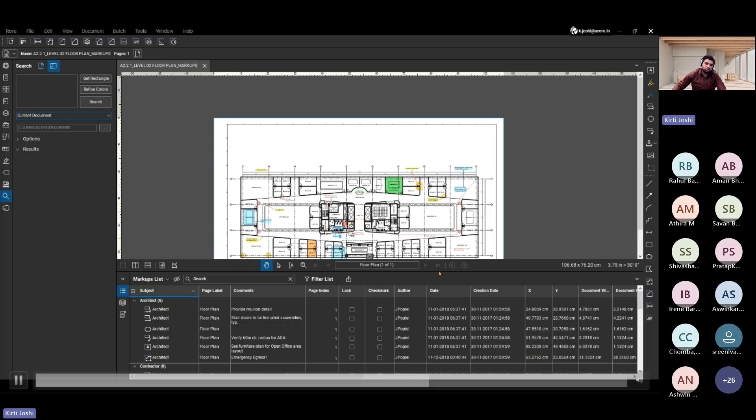So visual search is another interesting feature. If you want to look at all the symbols or images, like for example a shear wall tag or expansion joint symbols, across 200 sheets of your drawings, you can use this visual search feature, and Bluebeam will find them automatically and help with the count as well. We'll try to use this feature on this PDF drawing.

On the left hand side, you will see the search symbols option at the bottom. Simply click on it, and you will have the visual search symbol option. Once you click that, you get rectangle options. If I want to take an image to count the number of items in my drawings, I can simply click the visual image, click on the search options, and it will display it.

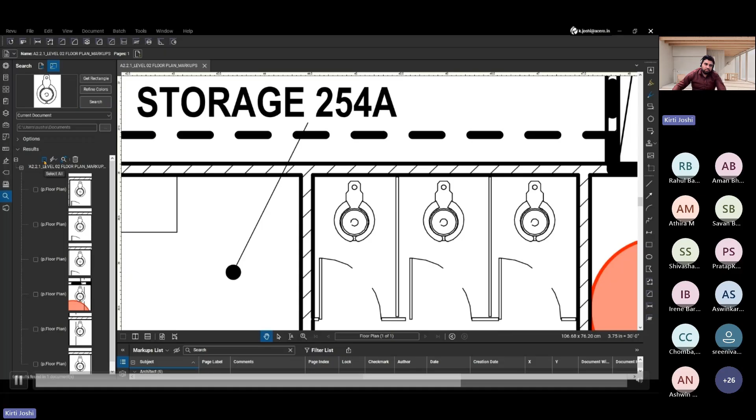It has displayed all the matching images from my drawings, and you can simply click on the check items and then click tick. Once I've selected the visual search option, it gives me the count feature as well. You can click on any of these counts and give it a name - for example, water closet - and you can track this in the markup list below as well.

Later, you can export this count measurement into Excel as well. Right now, I've given it a name and it's all recorded in the markup list - the count is 6 right now, as you can also verify in the image.

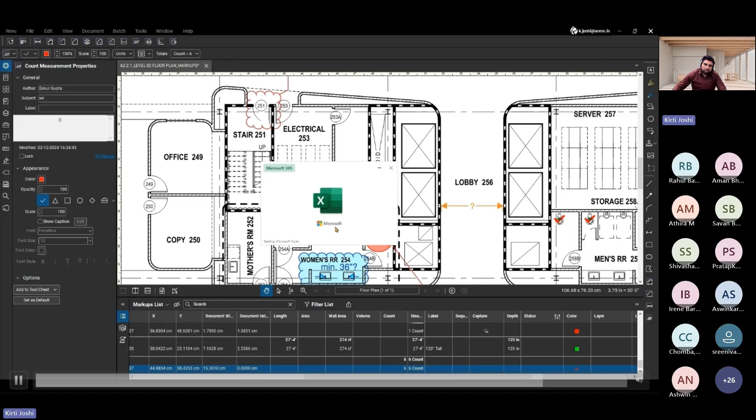Once you click on the summary options by filter and sort, you can set whatever you want to export. So I click on WC, and if I click export, it will export it in the form of Excel right now.

It also basically helps in taking measurements if you have an electrical drawing and want to count the number of switches. You can simply use the visual search icons, and it will automatically count from the PDF drawings.

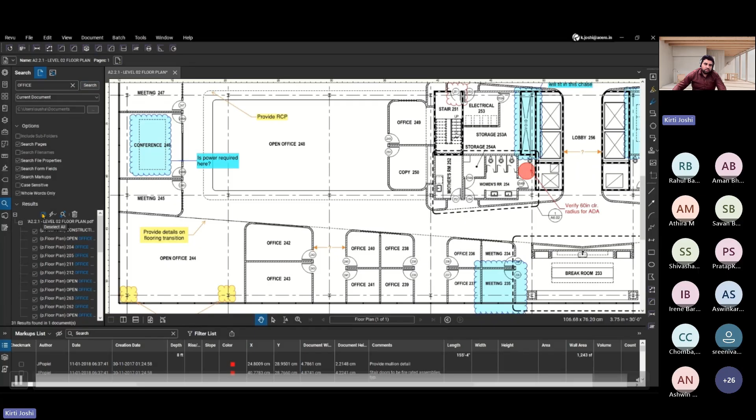Right now, you can see the number of count is 6. Also, you can search for the text as well besides the symbol. So there are options in the left hand side for the text. So right now, I will just click the office. For example, you can see there are lots of the office text in my drawings. And once I click on that, it will just count the numbers. It will just highlight it in the PDF as well.

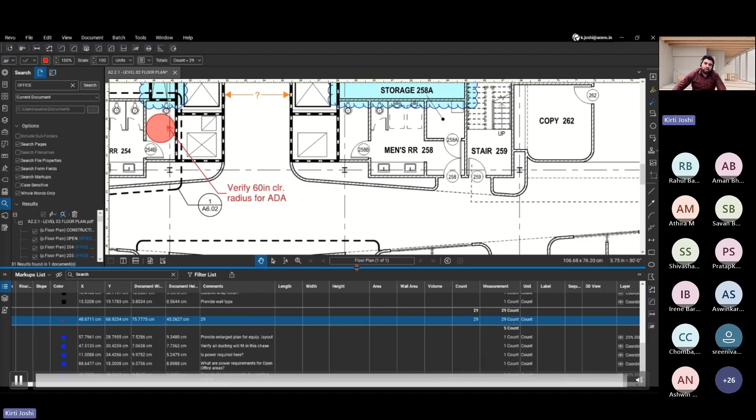So this is the way where you can search your text or the image from your PDFs, and it can generate the report in Excel as well. So as you can see on the slide as we move forward.

What I want to highlight is how it adds value in different phases, like how Bluebeam supports across the different phases of the project. So for the planning and the designing, you can use Bluebeam for the markup, the annotations, the design review, and the overlay compare documents. In the pre-construction and post-construction, you can use it for the takeoffs, quantity takeoffs, approvals, or the RFI templates, the real-time collaboration. So what I meant is it performs a digital and clean handover for your documents, which can be ready for the operation and the maintenance team.

So what I meant is these numbers reflect what happens when the communications become structured, or when the comments are centralized and tracked, and it obviously reduces the mistakes. I mean, the mistakes are reduced naturally. So professionals who are using Bluebeam report that there is significant improvement in the productivity, accuracy, and the team coordination across all their projects.